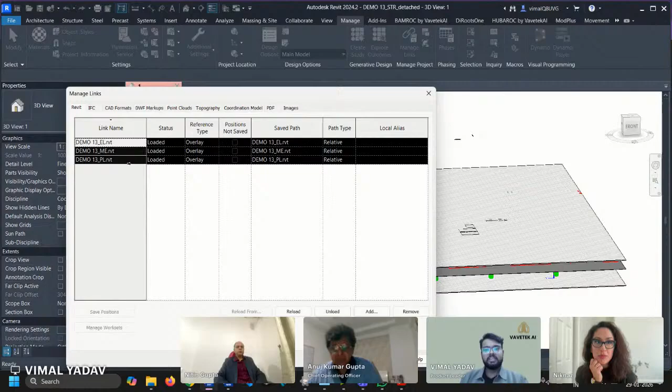So basically, right now we have a structure file here, and what I've done is link all the MEP files - electrical, mechanical, and plumbing files - all linked together. Before running BAMROC, first I want to detect clashes, so I've already taken a Navis export of this. I'll be simply using Navisworks to detect those clashes. Let me simply append these files, which would be here.

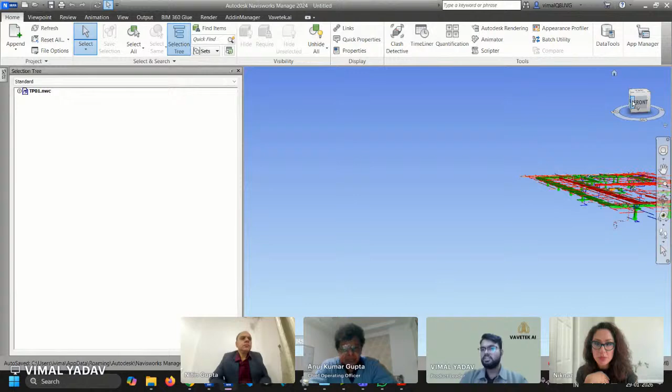Okay. So this TP01 file represents the before situation of the model. And right now we have all the MEP here.

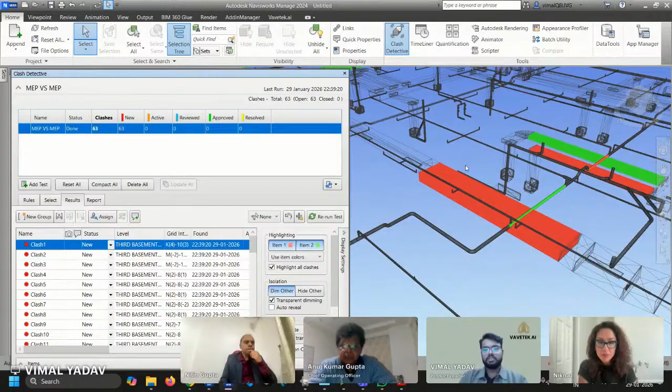What I'll be doing is I'll be running a simple MEP versus MEP clash test. Okay, great. So we have about 63 clashes in this particular model.

Now the next step is to create a report of these clashes, and then we'll be running BAMROC. So we have our own plugin here within Navisworks, and this BAMROC clash pair file is going to create that report for me.

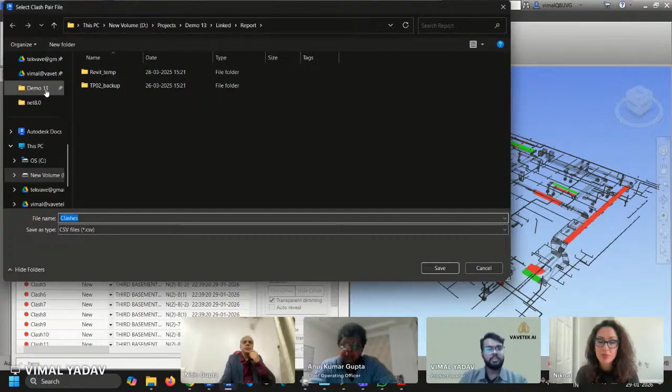Okay, so I'll replace this existing file.

Okay, great. So we have generated the clash test. We have generated the report as well. We can head back to Revit and run BAMROC.

Now, first of all, I need to check on this section box. Now, this is important to run BAMROC. Also, this is helpful in running a particular portion of the project.

So using BAMROC, you can resolve clashes floor by floor, tower by tower, or just in the corridor also. All you have to do is just adjust the section box and BAMROC will take care of the rest. So now I'll simply click this Run BAMROC button.

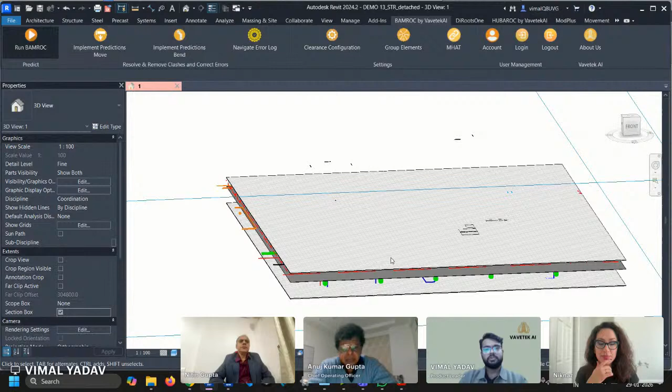So there are some guidelines. I'll quickly jump through them. So first is that I need to link all the files.

So as you saw earlier, I had opened the structure file and linked all the others. So if I have an architecture file and interior design file, I need to link those as well, so that the software has the right context of where exactly the boundaries are - boundaries of the false ceiling, of the floor slab, or just the walls.

Now, second point is regarding those projects where you might not have a false ceiling, such as basement car parkings or office spaces. What we recommend is you simply draw a reference false ceiling at the minimum clear height so that BAMROC knows that this is the final limit where the MEP can go.

Now, third and fourth point are just an extension of this. What BAMROC is doing is resolving clashes in the false ceiling area. So we want our MEP systems to be within the floor slab, within the false ceiling, and the external boundary walls. Now, fifth point, very important.

We see across the industry in all the projects, engineers will model out these MEP systems but would not connect the elements properly. Now that creates a problem since then BAMROC is understanding a single system as multiple systems, and then it cannot adjust those systems properly. It might go haywire.

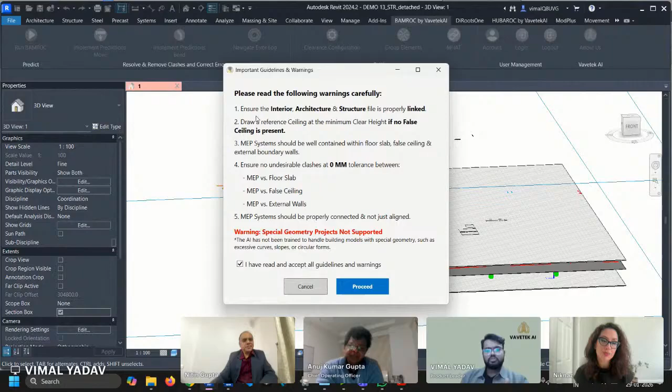So anyway, we'll proceed now. And okay, so this is a health check. I'll come back to this later. I'll close this. And now I get to choose from these two strategies.

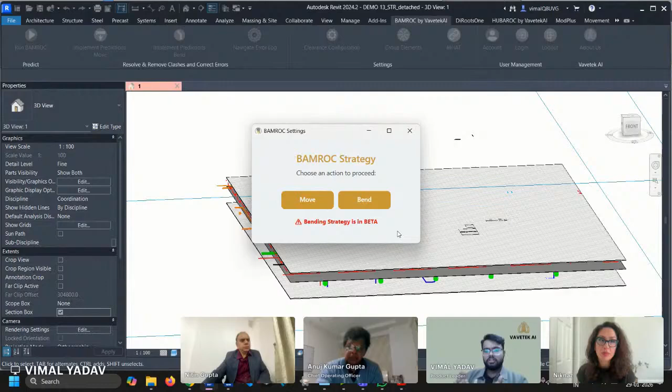So move and bend. As the naming suggests, move is going to move the elements and bend is going to bend the elements or systems to resolve the clashes. Also, I would like to mention here that BAMROC fundamentally does not create new clashes. You can use either of these strategies or algorithms.

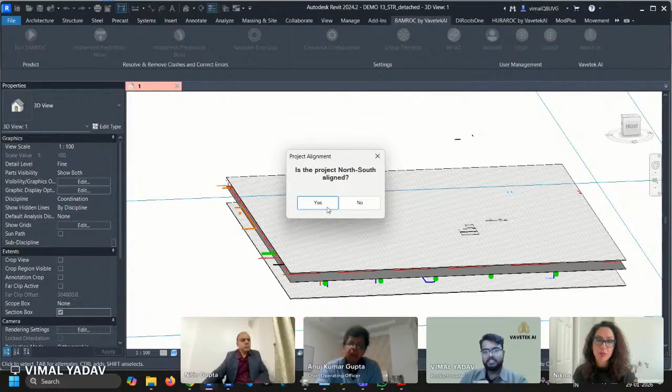For now, I'll go ahead with move. Okay, so it's asking me, is the project north-south aligned? Yes, it is. So if it is not north-south aligned, you can simply rotate your section box and it will just work fine.

Now I can choose the performance mode for this project. Now this is a simple project, not a lot of density in the clashes, but if you have a lot of congestion in the MEP systems, you can use the high mode to resolve even more clashes. It thinks almost 10 steps ahead of the medium performance.

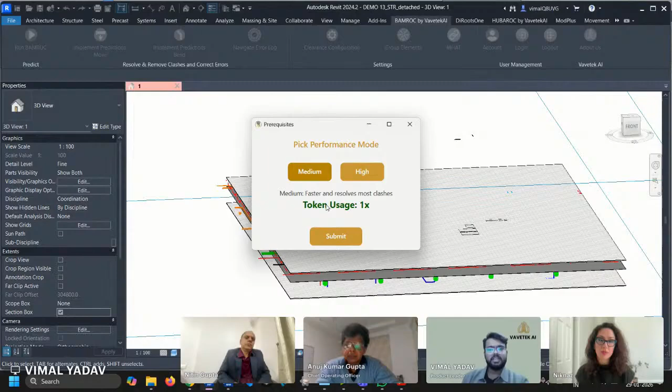Let me just hit submit. And right now it is basically collecting the geometrical, mathematical information from the models. So it's collecting all the information - the geometry of your walls, of your false ceiling, of your MEP systems, everything.

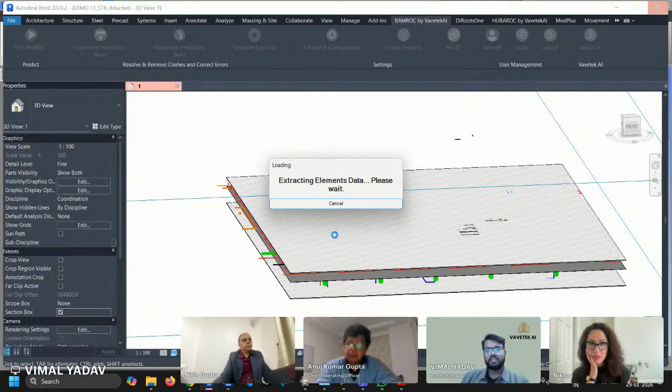So this shouldn't take long, almost done. I'll go ahead. Okay, so we have 4 Revit files here, but BAMROC can handle almost 20 or 25 Revit files. If your own machine can load these files, you can link them. It's perfectly fine for us.

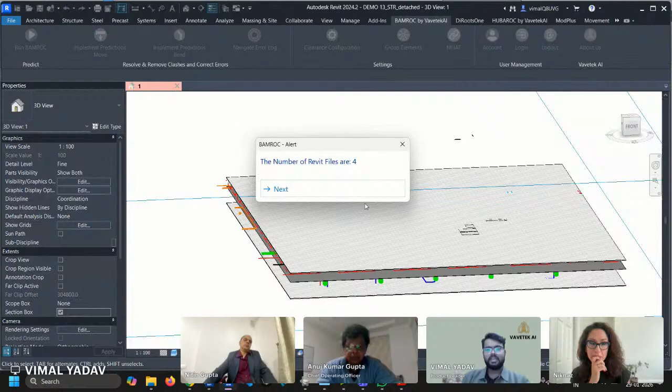Okay, now I need to upload the clash file. So this is the same clash file that we generated earlier. I'll click yes.

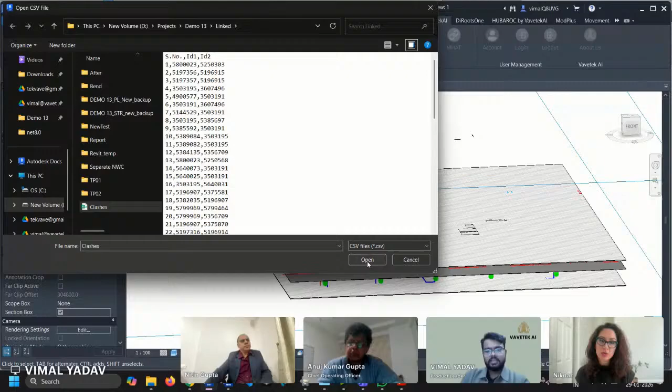Let's take a look at this. You can see this clash file is nothing fancy, just element IDs of the clashing elements. I'll simply open this. This is a small project, 4,000 elements, but we have worked with hundreds of thousands of elements also, so size of the project is not a problem.

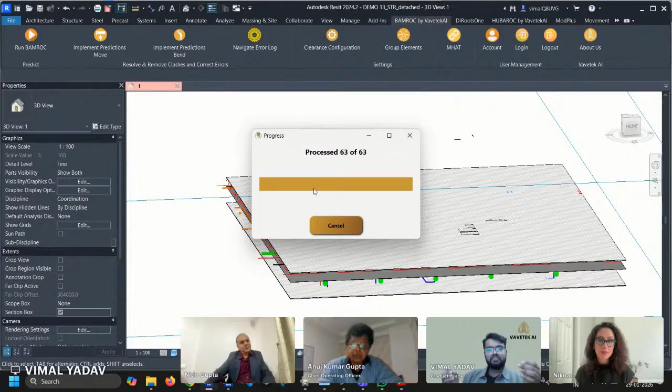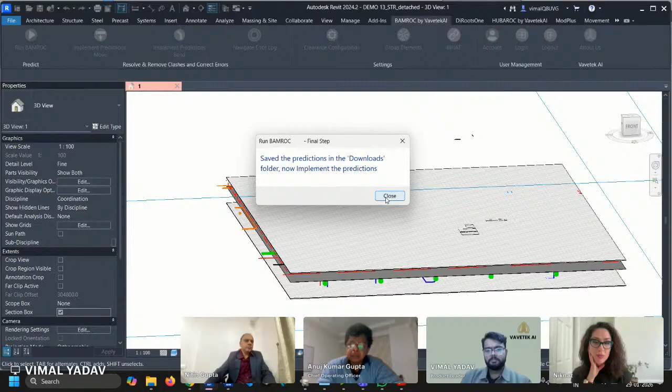I think tokens we can come to later on. Now here's where the magic is happening in the cloud. All these clashes are getting processed on the cloud, and BAMROC will one by one generate predictions for all of these clashes, and it will download a prediction file in my downloads folder. For this project, it's almost ready. For much larger projects with thousands of clashes, it could take 20 to 30 minutes or so. This is also fine.

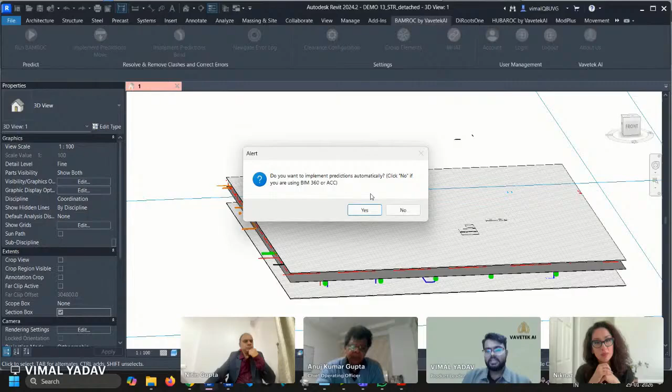Now this is an interesting part. Till now, my model has not really changed. I have only generated predictions from BAMROC. Now the next step is to make the changes in the MEP files, and for that I'm going to automatically have BAMROC implement these. But if we are working with BIM 360 or ACC, what I need to do is use these two implement prediction buttons that you see on the top. So now this could take a couple of minutes.

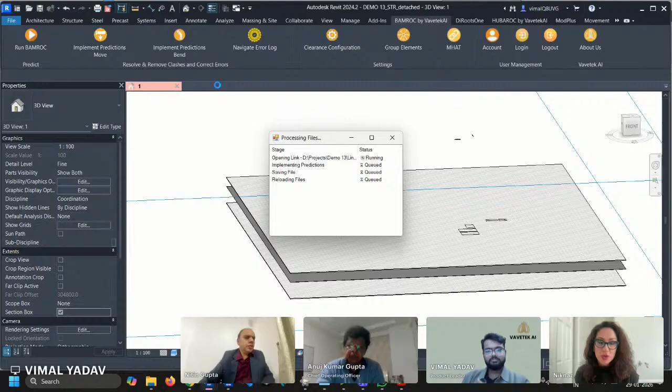I think we can take some questions as well. So Vimal, why don't you go over the regular frequently asked questions? Sure, from your memory we can do it.

Can I ask one before you do that? Now that it's processing in the background, are we also able to see visually all the clashes? I think we will, after it's done. Oh yes, so we will be actually generating a visual report after all the predictions are implemented.

Got it, I have the final resolutions and I can actually see. So we have developed a tool which can generate a visual report for you, and you can actually go clash by clash, see how it looked earlier before BAMROC, and how BAMROC has resolved it. Yeah, we'll do that also.

Niknaz, there is an interesting story behind this. When we initially developed the algorithm, there was a regular anxiety about what the software was doing. In fact, what we used to do was go clash by clash, element by element, and literally go into Revit to see what the software did to resolve the clashes. So then we finally said, why don't we make a tool out of it? It addressed that regular anxiety, and that is when we came up with this.

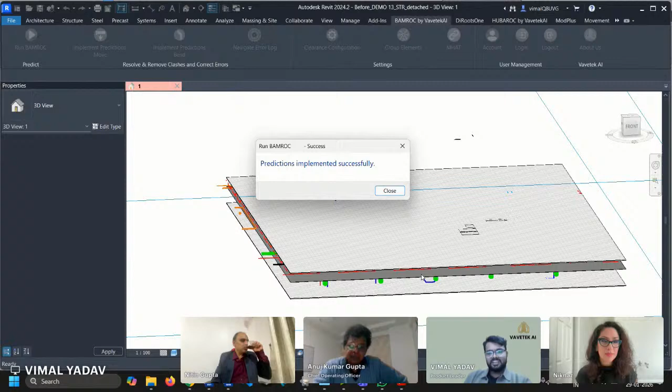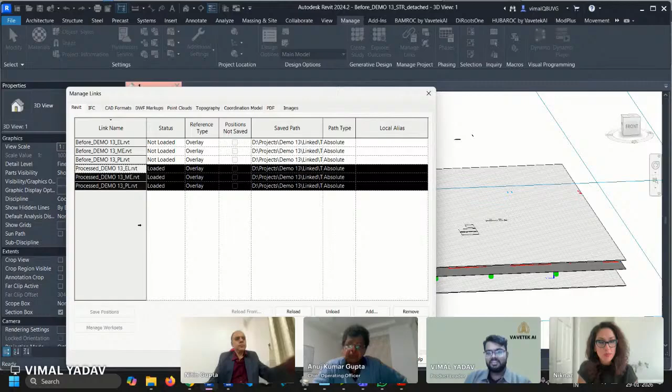So we'll go ahead with Vimal continuing. So basically, the clashes are now resolved. We have the revised Revit files. If I go to manage, now you can see I had these before files. These had clashes. Now what I'll do is simply unload these. These three processed ones are clash free. Now I'm going to take them to Navisworks and we'll see live how many of those clashes are now resolved, and we'll also check them subjectively.

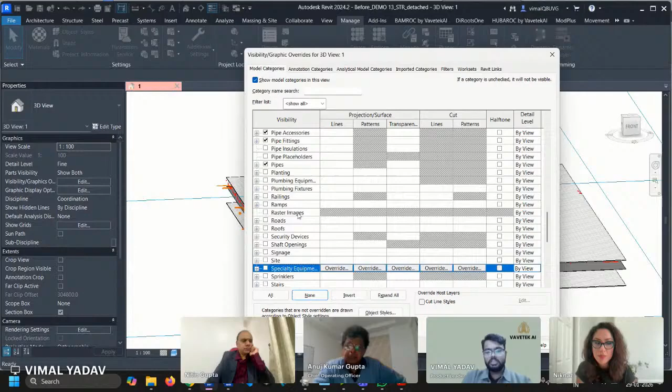So let me quickly export my Navis. Okay, so I'll take cable trays, duct accessories, fittings, mechanical equipment, and the pipes. Although in this demo we are only showing MEP versus MEP clashes, BAMROC can resolve MEP versus structure clashes also, so that is also supported.

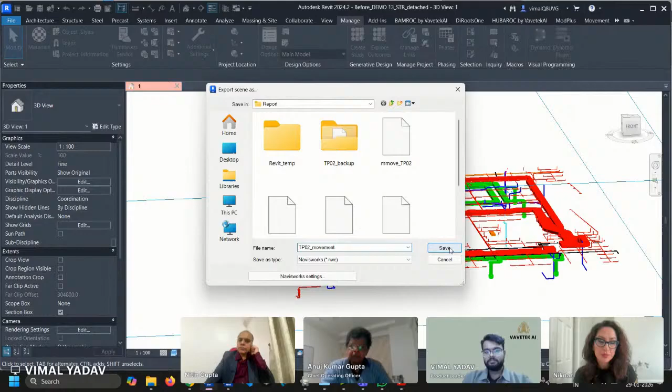Let me give it some name. Let me do TP02 movement. Okay, since this is a smaller model, it shouldn't take long.

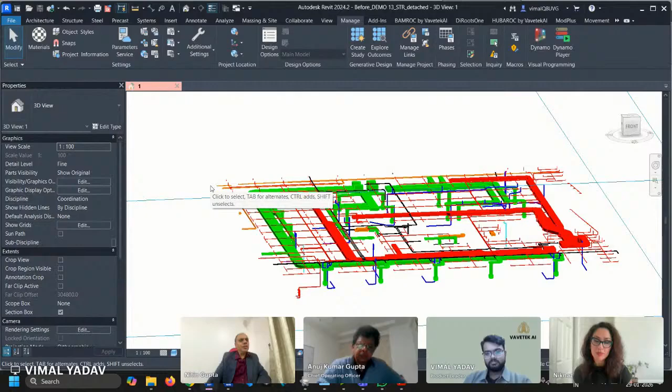Something very fundamental is no new clashes. That has been the mantra from the beginning. Believe me, we are still facing a challenge, we still keep getting surprises. However, with more tuning, improvement, and development, we have been able to bring down the number and percentage of new clashes to virtually zero. However, we have also learned that the whole industry around the world, regions work with their own level of BIM standards, so there are challenges that keep coming for the software.

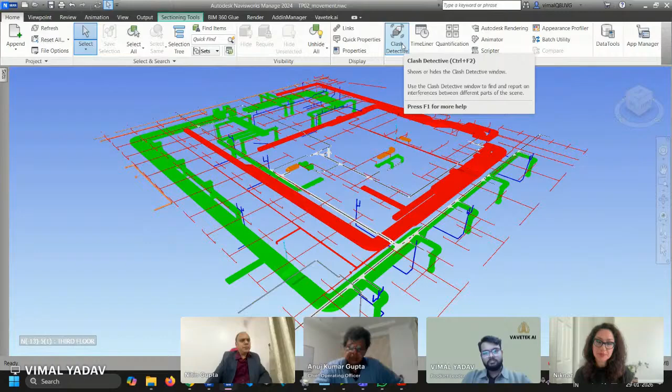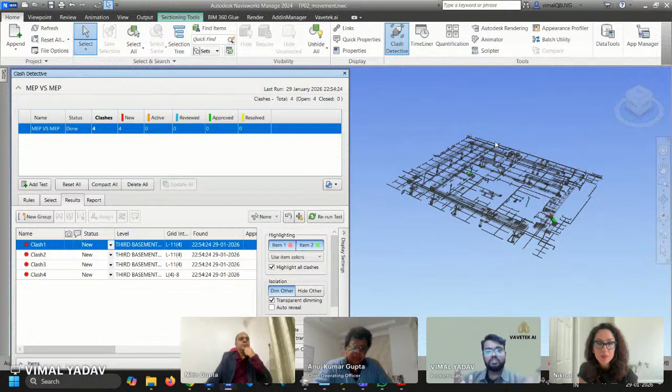Okay Vimal, go ahead. So we have the Navis file of the resolved model, and again I'll be running a simple MEP versus MEP clash test, just like earlier. Great, so we are left with only 4 clashes now. Now what I want to see is how those clashes got resolved, so what I'll do is create a visual report. So I'll get my before file from there.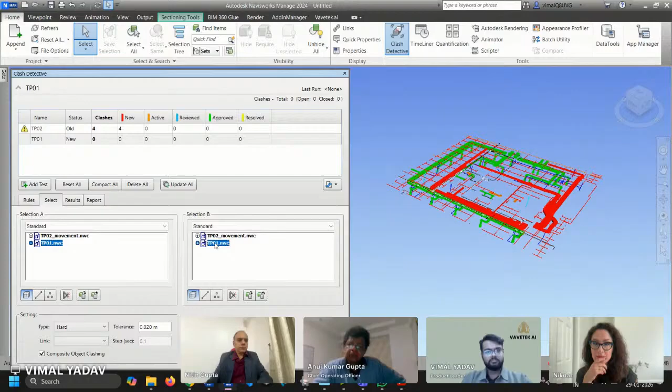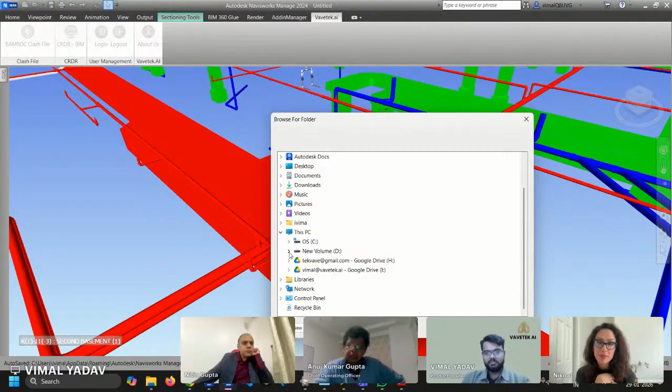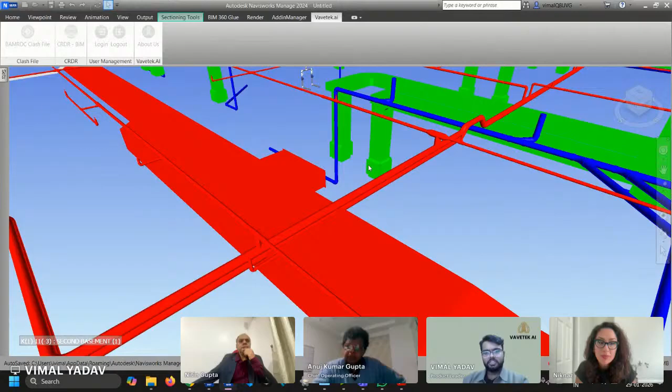Okay great, so we'll go ahead with default settings. We'll check for new clashes, and we'll also include pictures. For these many clashes, within 15-20 seconds we should have the report ready. For 1,000 clashes or so, it could take 5 to 10 minutes to generate. It's basically clicking pictures right now, that saves a lot of time.

So in 10 minutes it detects the clashes... not fix them, what I meant was you can generate the report within 10 minutes for thousands of clashes. Now, this is for this tool, but with BAMROC you can actually resolve 500 or maybe even 1,000 clashes within an hour or two. Right, within an hour.

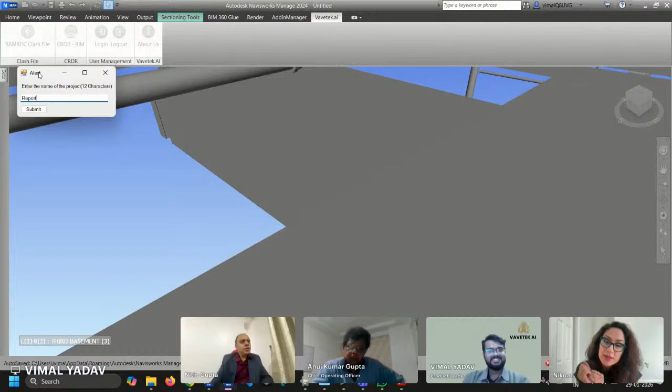On average, we have seen that for large projects we are around 10 to 11 times faster than the manual methods of resolving clashes.

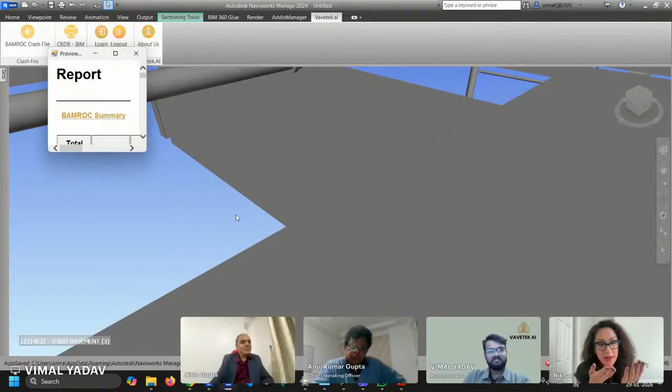That's awesome, I was just gonna ask that, comparing. So how long would it take a team of, say, one person to do this manually? At least a week, I guess, right? The average of the industry is that a modeler or coordinator is able to solve 60 to 75 clashes per day. Oh wow, okay, and that is the average.

It's a very painful process, it requires a lot of back and forth. As you saw, we were able to solve these 63 clashes in around 15 minutes running this program, but Vimal had made some setups earlier, and those setups require another 15 to 20 minutes. Then give it another 15 minutes to understand the project, and finally to validate all the resolution, plus the remaining four new clashes that we are seeing. So overall, I'd say this project end to end would not take more than 50 minutes. So that's what it is.

Something that required a day to solve, we are able to solve in 1 hour. This is the kind of efficiency you are looking at. That's amazing, that's very impressive.

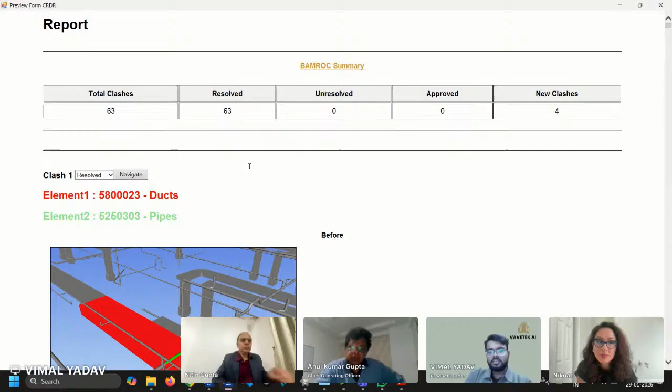Definitely. As you can see in the summary at the top, 63 clashes are resolved. Now, a lot of cases might not be resolved. If I can also check them as approved if they are. Let me actually go through one of the resolutions and show you how it's done.

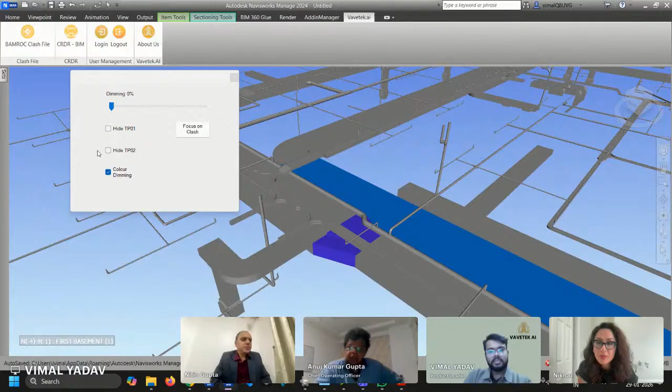In this report, I can hit this navigate button and it takes me directly to the model. So what I can do is hide my resolved model and see how it looked before. Let me check off this also. These red dots you see, these were the clashes earlier. This pipe was almost inside the duct, and these two ducts are also clashing. And there are some more clashes over here.

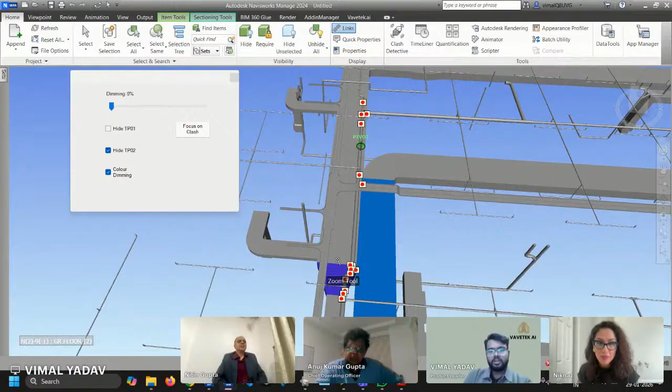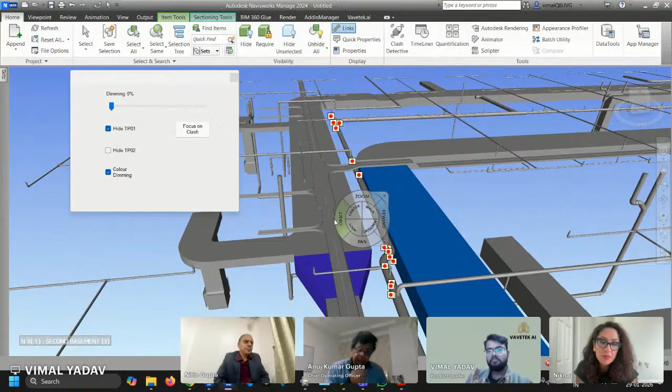Now let's check what has happened after we have run BAMROC. Okay, so basically I switched and now we are seeing the resolved model. The clashes are now resolved, and as you can see, the design has not changed fundamentally. The design stays the same. So I would say that is one of the wonderful things about BAMROC, that it does not change your design. You are the owner of the design. BAMROC is only resolving clashes by making very minimal changes in the model.

Absolutely, this is very, yeah, this is the...

Sorry, please. I was just wondering about code compliance, because codes are all different all over the world. So how does that work as far as the dimensions, the duct, the slope, and all that? How do you take that into account?

Okay, great question, Niknaz. So what we are trying to do fundamentally is make the rules as modular and as flexible as we can. Rather than making it customized for different codes, we are trying to build in features that let the customer create their own settings.

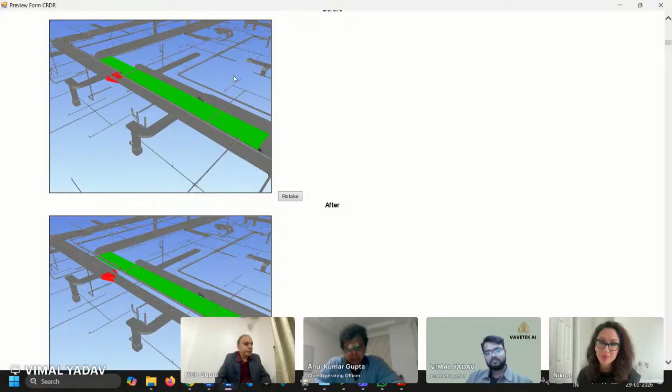For example, if you want a maintenance gap between two different kinds of services, a lot of times we hear, and as an architect I've experienced myself, that a cable tray is an element that requires maintenance. So between a cable tray and any other service, you should have a gap of 300 mm. That is the ideal gap, and you can specify this. We have a feature in the software which allows you to specify the clearance around the element, both in the horizontal and vertical direction. That is a setting that the modeler, the BIM coordination team, or the MEP coordinator can do, and that can be done region wise, whatever settings they want. The software will follow that. This is just an example; there are many more rules that are built in and can be built in.

So the whole idea is that tomorrow, if we were to have a customer who says, I always want the electrical cable trays to run above the water supply pipes, we can build that as a rule. Right now we have not, because we don't see that as a regimental rule being followed everywhere. However, if a customer wants that as a standard for their own company, sure, that can be built into the software, and the software will keep on following that.

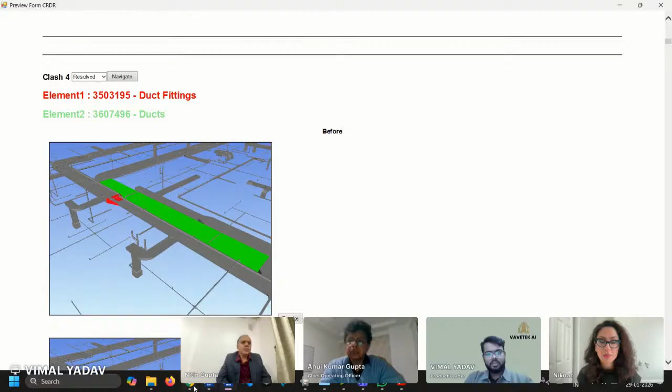Sure, so Niknaz, at this moment maybe we can just show our PPT. Vimal, why don't you go straight onto that world map that shows our present outreach? Yeah, that'll probably be a good way. Okay, I'll have to switch my screen. Just give me a moment, I think we are done with the demo. Yeah, play it Vimal, meanwhile I'll just keep talking in the background.

So Niknaz, we started reaching out to potential customers for beta testing back in April last year, and we beta tested the software for around five months, which is when we launched it formally for customers. We've sold a couple of licenses in Saudi Arabia. What we're observing is that the maximum traction we're getting for the software is in the Middle East, especially Dubai and Saudi Arabia - UAE and Saudi Arabia.

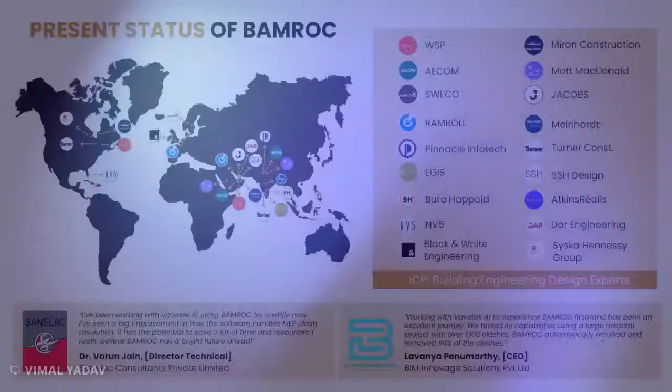Yeah, this is the world map, so this really shows the present situation. On the world map you can see those dots, which are really logos of different companies. We've reached out to all of these companies, we've given demos to all of them. You can see these are some of the largest companies, mostly engineering design companies. There are also turnkey contractors who do clash resolution as part of their scope, so they are also in touch with us.

I'd say the software hasn't actively been used till now by most of our beta testing partners. However, the couple of customers we've sold it to are using it very actively. And we are looking ahead to a paid pilot with some of these large engineering consultancy companies. As of now the information is confidential, but very soon, once we're doing the paid pilots, we'll be able to take their permission to name them.

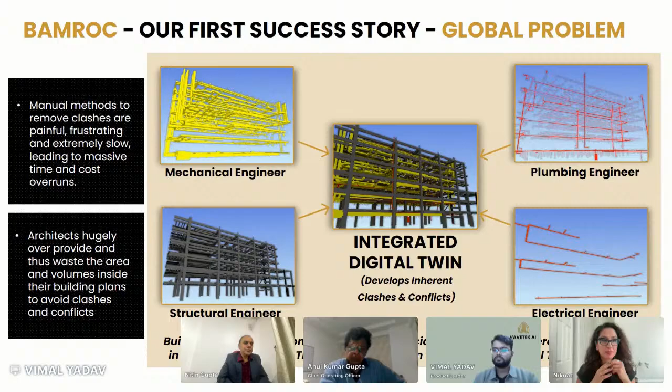Okay Vimal. As we showed this slide already, we can skip this — I think you've given a live demo already, and we've been through frequently asked questions, so you carry on.

On privacy and data security, we are right now not retaining any data at all. The data, as you saw, is just mathematical data that goes to the cloud, gets processed, and is sent back. That is what we are doing.

So, roadmap further ahead: we've already started work on the co-pilot for structure design optimization. Anuj is working on that very intensely. We've already created a proof of concept for isolated foundation design, and very soon we'll be opening up for beta testing for partners. Then we intend to move on to air conditioning design, and after that to facade design.